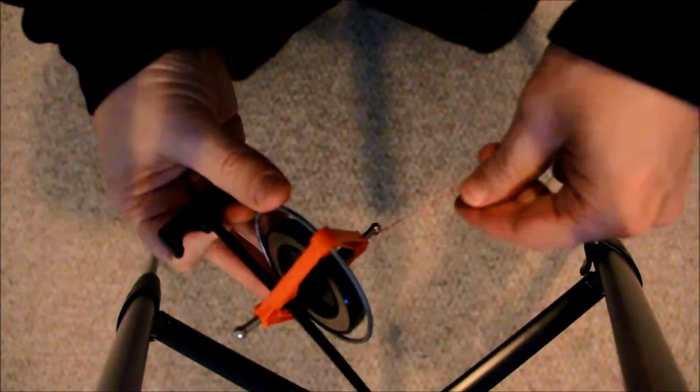I have a gyroscope, which is essentially a disc that's pretty heavy and is on an axle, and most of the mass of the disc is towards the outside to give it high moment of inertia. When I pull on this, there's gears that make it turn and spin counterclockwise when viewed this way.

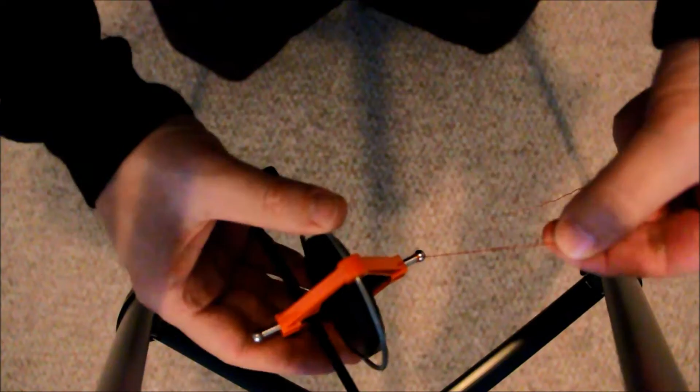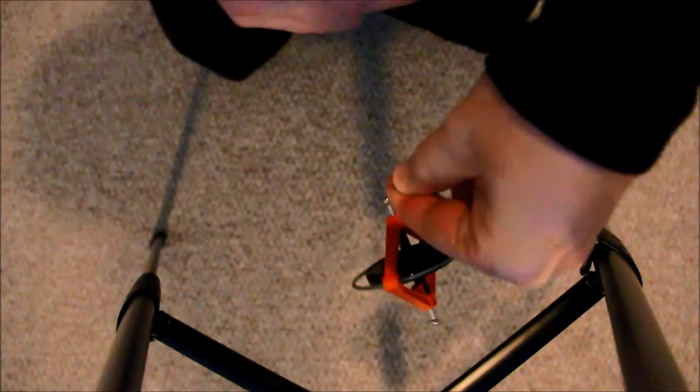Then I have a string on this end which is connected to this end of the gyroscope. I'm going to pull on it, we'll view it from the top and view its motion. You can see from the top that it's making a circular motion. That's called precessing. Here's a side view of the same experiment.

In this problem, we're going to consider a gyroscope supported on one end, and the support is such that it doesn't allow the gyroscope to move up or down, or in and out of the board. So there's a force in each of these directions that prevents that from happening.

We'll also assume there are no frictional forces that create a torque to slow this from revolving or spinning. We could solve it assuming we knew the torque acting there, but for this problem we'll start out assuming those don't exist, which makes the problem a little easier to solve.

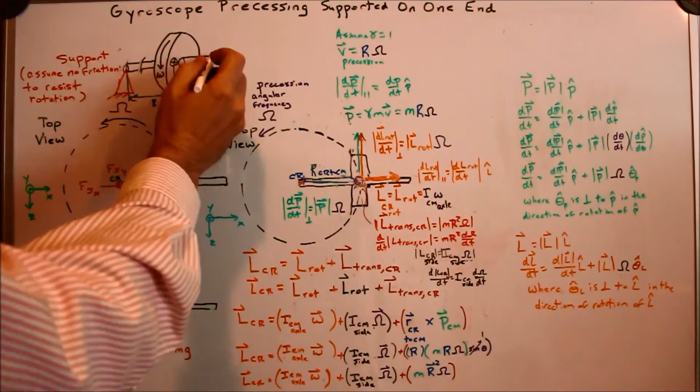So here's our system. We have a gyroscope, and it has the disc and axle spinning at an omega about the center axis of the gyroscope itself, and we'll define the distance from the support to the center of mass of the gyroscope as r.

Now let's draw the free body diagram in different views. Looking at it from the side, here's all the forces that act on it. We'll have the gravitational force pulling down to the center of the Earth, and then we have three component force vectors at the support end.

And here from the top view, we've got the same gyroscope. The X shows the force acting downward, and then I have the same three component forces. We're going to assume this gyroscope potentially has some frequency that it's precessing around this center fixed point.

As far as our system, we're going to pick just the gyroscope, and the surroundings is everything else.

We are going to define our coordinate system so that the x-axis corresponds to the direction from the center of rotation to the center of mass. Let's make our problem a lot easier to solve by having that coordinate system.

If we had it up here, then I would have my x direction running this way. But the x direction is not moving. This is an inertial coordinate system, but it is fixed to the Earth, not moving with this. Essentially we're going to say at this moment in time, when this is moving around and spinning, I'll take a snapshot, and at this exact moment of time I'm going to have that axis defined right here.

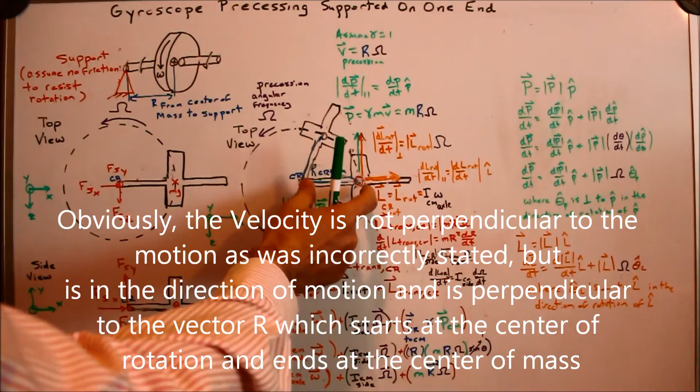So what's the velocity of the center of mass? It was here, it moves to there. The velocity is in the direction of the motion, so it'll be there. We know that the velocity of the center of mass, due to precession, is this radius times the angular frequency. The angular frequency of precession was capital Omega. So we'll have a velocity of precession, which is r times Omega.

For momentum, here's the most broad definition. For this problem, we'll assume the velocity is very small relative to the speed of light in a vacuum, so gamma goes to 1. Essentially it's mass times velocity. Velocity is here, so this is our momentum magnitude: mr times the precession angular frequency.

This is in the same directionality as the velocity. So the velocity is this way, on this plane, and there's my momentum term at this point in time. Then it's helpful to consider what's happening to momentum at a later point in time. At that later point, the momentum term would again be something revolving — the velocity is here, so therefore the momentum is there.

Now for this problem we're concerned about the rate of change of momentum as a function of time. This momentum term can be speeding up or slowing down in a given direction — let's call this the p-hat direction, the unit vector direction of p at this moment of time. So it's that direction, and later on it's this direction. We know one thing for sure: the directionality of the momentum vector is changing with time. So the derivative will have a change in directionality with time, and could also have a magnitude change.

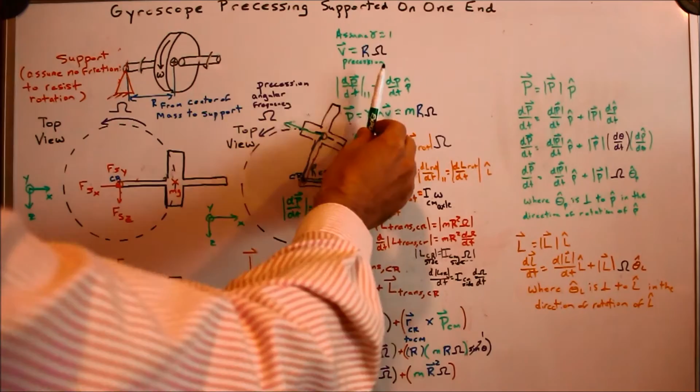Then for a vector which is circling and changing directionality, it starts out here and goes to here. We know there's a vector pointing towards the center, which is the rate of change of momentum versus time, perpendicular to its present p-hat direction. This is always the magnitude of p at that moment times the angular frequency that this momentum vector is changing. That momentum vector has the same frequency as this gyroscope, so that's the angular frequency that goes along with this term. That change vector is in this direction, so this term is pointing towards the center direction — or here, it's pointing to the center direction as well.

So now we know momentum, and we understand both its magnitude and its direction.

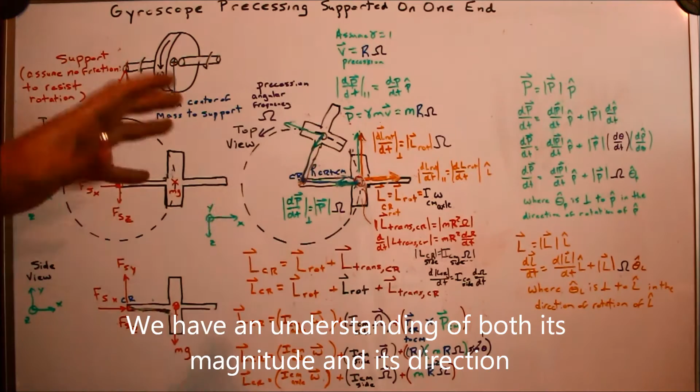Now thinking about angular momentum, because we're going to use that when we solve for torque. The broad definition of angular momentum — first of all, for angular momentum we have to think about angular momentum about what point, because angular momentum is not a constant. It changes depending on what point you say it's about. So this system, from the top view, is rotating about the center of rotation.

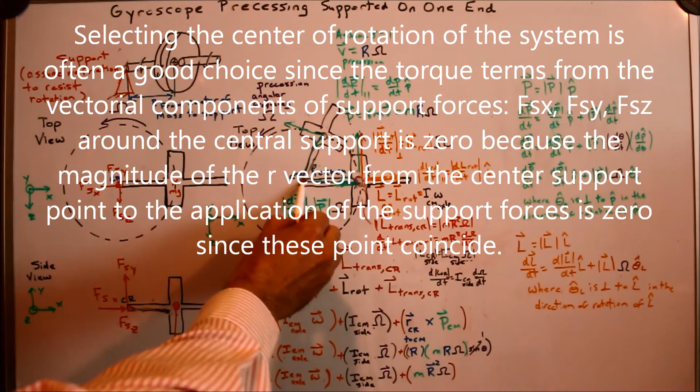For cases where I'm rotating about a center point of rotation, it's very convenient and makes the equations much easier to solve if I do my angular momentum with respect to that center rotation. So the point I'm going to pick is the center rotation. I'm going to solve it that way.

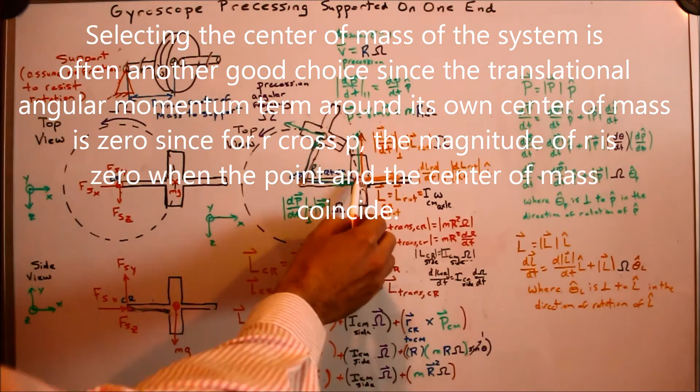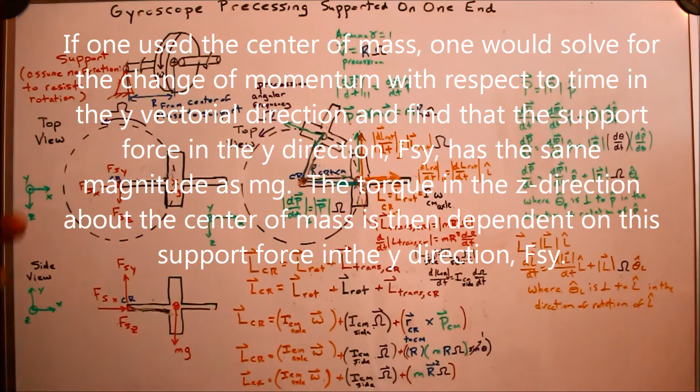Alternatively, another good point that's often very good for helping to make the problem simple is to do the angular momentum about the center of mass. I'm not going to solve it this way, but I can probably do that in a future follow-up video to solve the same problem considering angular momentum about the center of mass. But those are two very convenient points that help make the system a lot simpler to solve.

So now we picked the point that we're going to do the angular momentum about. We call it the center rotation. And we know there's two parts to any angular momentum: there's a rotational part and a translational part.

So for rotational parts, you have to think of two things. Consider its rotation has no subscript, because rotation means rotation about this own system's center of mass. It's not relative - doesn't matter if it's about CR or the center rotation or center of mass. This term, the angular momentum of rotation, is by definition about this own system's center of mass.

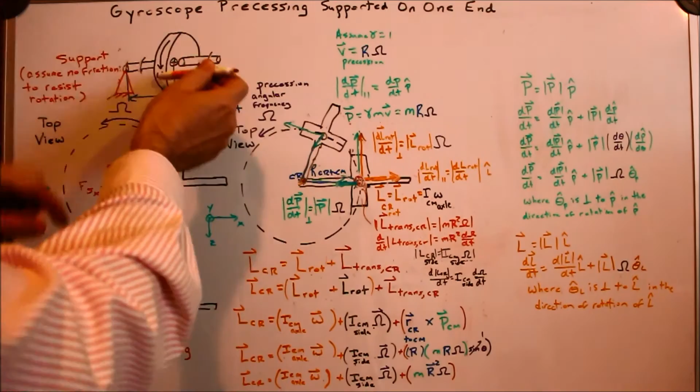So you think: does this system, relative to its own center of mass, have any rotation? Well, it does. One rotation it has is we know it's rotating along the center axle of this part. At this moment of time, it's spinning with an omega term here. So this disk is spinning, and that's spinning relative to the center of mass of this part. So that's going to provide us with a rotational angular momentum term.

Then, is there any other terms as far as rotational? Is the center of mass rotating at all? Well, if you think about it, this object right here is at this orientation from a top view, and then later it's at this orientation right here. So relative to its own center of mass, forget that it's translating or that the center of mass has moved - there is a rotational, top-view rotation about its center of mass.

Here it's pointing there. Later on it's going to be pointing this direction. So it's flipped from there to there, and then it's flipped to there. So there's a rotation in the top view. So there's actually going to turn out to be two rotational angular momentum terms.

For each one of these terms now, which are components of the angular momentum about center rotation, we need to concern ourselves with and understand both the magnitude and the directionality of these vectors. So first solving, we'll do them independently. First considering ourselves with this object rotating about this central axis. So let's do magnitude first.

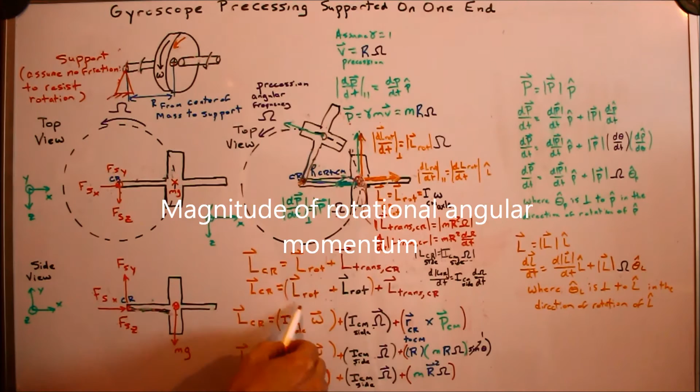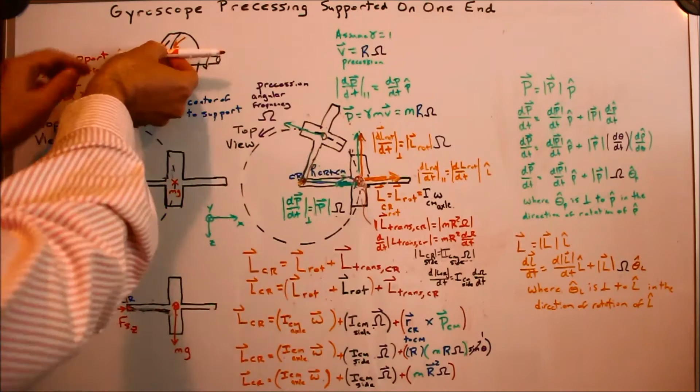So magnitude of rotational angular momentum is the moment of inertia about that center of mass as seen by this rotation - the moment of inertia around this central axis of this. And then it's multiplied by the angular frequency that this part is spinning. So that's the magnitude of this term.

So that's the magnitude. And then the question is, what's the directionality? For that, we're going to use the right-hand rule to determine directionality. So we have this thing spinning like this, with angular frequency little omega, and so my L rotation vector is in this direction. If it were spinning in the opposite direction, the right-hand rule would tell me it would be this other direction. But I've chosen to make omega this way, so that's my L direction.

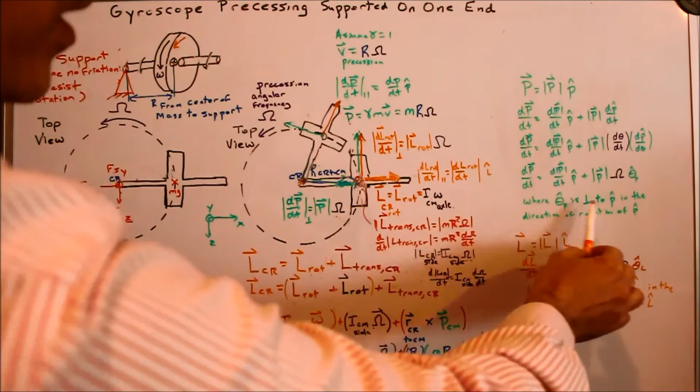And then the question is, as this is precessing around, at this moment of time it's still spinning in this direction. At that moment of time, this vector has now changed to there. So it started out in this direction, and at a later time it turned to this direction. So I can see there's going to be a derivative term that's in the direction of this based on the magnitude, and a direct derivative term which is perpendicular to that. Just as I could solve it right here, I can do the same thing here - this angular momentum term right here is changing.

At this moment of time, the angular momentum is the magnitude times the directionality, so this is the L hat direction, and I have a component which is also in the L hat direction, which is how the magnitude is changing, as I'm turning this way. This component is instantaneous, at that moment times the frequency that this is turning, just like the momentum term was turning at this frequency. That's the magnitude of this vector in this direction, perpendicular to the instantaneous direction of L hat. So there's my angular momentum term, there's my rate of change of angular momentum parallel to it, and there's my rate of change of angular momentum perpendicular, just considering this term alone.

So now let's consider the next term. Again, from the top view, we have this thing rotating this way, spinning like this. So something's spinning like that. I can see that the angular momentum direction is going to be out of the board, about its own center of mass. So I know this one's vectorial direction is here out of the board, and right here at this position it's spinning about this point, considered spinning about its own center of mass. So it's out of the board here, out of the board here.

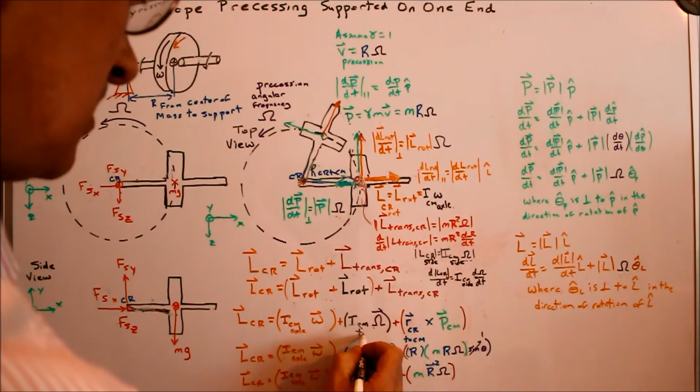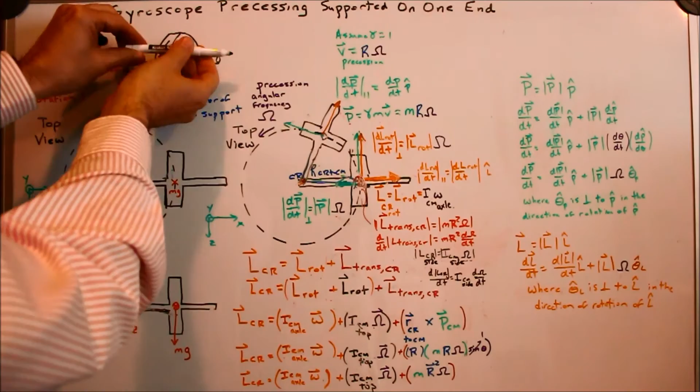There's no change in the directionality of this vector, so the only thing that can potentially change is its magnitude. So what is this magnitude? It's from this top view, or side view - I guess we'll call it top. From what's seen by the top view, what we can solve, we'll have to have some information about the geometry of this gyroscope, but what's the moment of inertia about the center of mass in this top view? That's different than this one - it's resistance against spinning in this direction. This one was resistance against spinning along the axis. So those are two different moments of inertia about different views.

And then that's that moment of inertia times the angular frequency. Where here was the angular frequency about spinning in that direction, this is the angular frequency about spinning this way, which is capital omega. So now we know this term, and we know that both its magnitude here is in this direction, and potentially its only rate of change is in this direction. It has no component this way because that vector is not changing. So now we know everything about this term - its directionality, its magnitude, and its derivatives versus time.

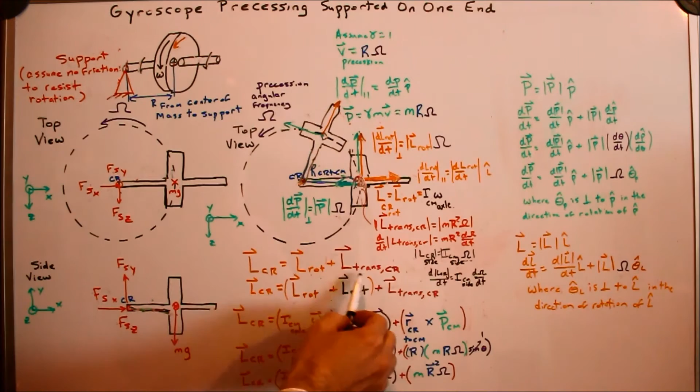Now let's consider this term - translational, remember, consider everything boiled down to a point mass located at the center, and it's R cross P. So what does that mean? R is a vector that has magnitude and direction, from this center of rotation to the center of mass. So there's my R vector. And then P is the momentum of the center of mass, so that's going up. So R cross P - I know that this vectorial term is, once again, coming out towards me, so it's going up, pointed in the upward direction.

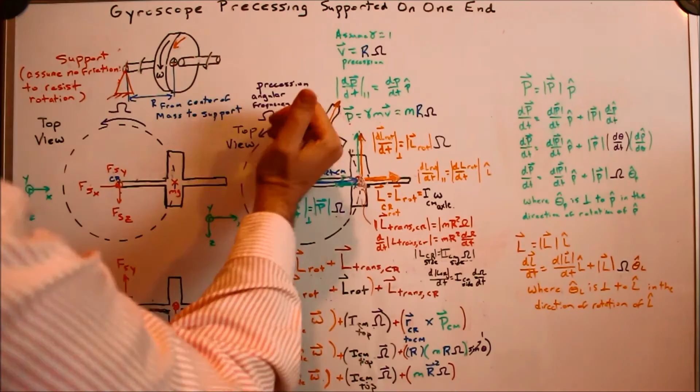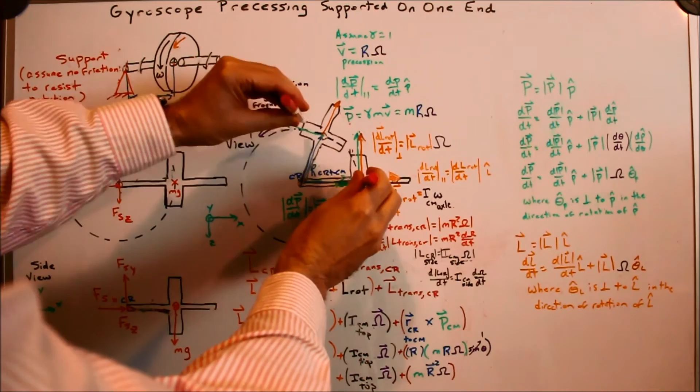And then at this moment of time, the R cross P again is pointed up. So at both moments of time, this vector is pointed up, so there's no directional change of this vector. The only thing that's changing is magnitude - if it's speeding up, if the P term changes, while R's magnitude is constant, that term's constant. This term may be changing. So now we know the directionality of that, and at any moment of time, this R and the P vector are perpendicular, so the sine of the angle is 90 degrees, so it's 1. So here's the magnitude of this term.

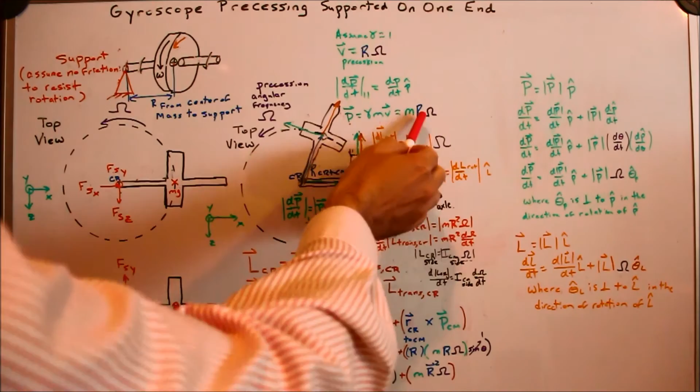We know P, center of mass, we got it from here. So R times m, R, capital omega, angular frequency, because we know that's how that P vector is changing. So coming in here, I can see that's m R squared, angular momentum. Now we have an understanding both of the magnitudes and the directionality of all these components of the angular momentum about the center of rotation, and we understand about the momentum and the rate of change of momentum and the directionality of all those vectors.

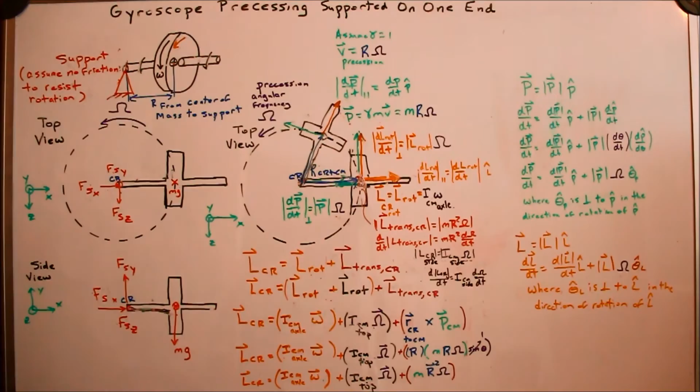We're going to use momentum now to solve for motions and some forces. The two momentum equations we know are that vectorially, the change of momentum with respect to time is equal to the net force on a system. Our system is the gyroscope. We also know that the change of angular momentum about any point equals the net torque around that point.

We're going to start looking in the z direction. So this component term, we can think just in the z direction: the angular momentum about the center of rotation in the z direction, and the net torque about that center of rotation in the z direction.

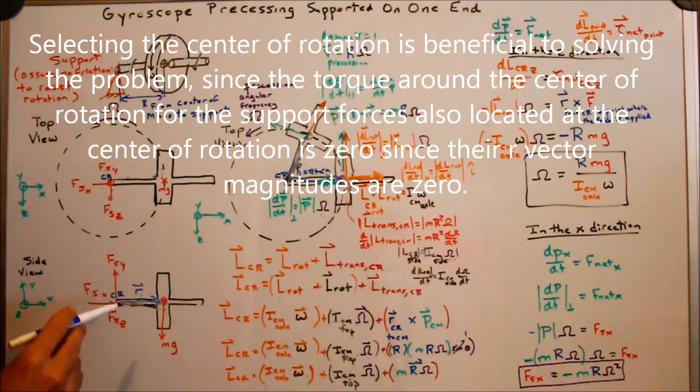So we'll start with this term, looking at the net torque. Torque is r cross F, where r is the vector from the point we're choosing—torque about the center of rotation—to where the force is applied.

Here's that r from the center of rotation to where the force is applied. This force is mg, and they're perpendicular to each other in my case. Using the right hand rule, r cross force gives a vector into the board. Or you can see it from the top view: here's my r, and the force is going down, so r cross mg is in the minus z direction. This torque is in the minus z direction.

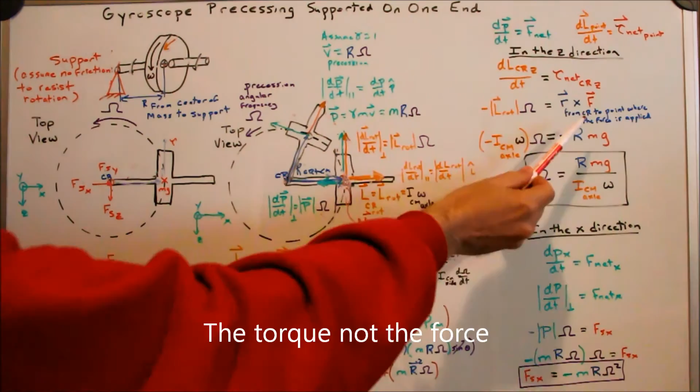There's this magnitude: the magnitude of r, and the magnitude of the force is mg. So our torque is r, which is that distance, times mg, and it's in the minus z direction. So there's this net torque around the center of rotation in the minus z direction.

Now looking at all the terms we had previously for the change in angular momentum, the only one we're concerned with is in the z direction. From the top view, that's something working either this way or this way. So it's not this magnitude change here, which is perpendicular to that, but this term right here we can see is in the minus z direction.

So this is a component of angular momentum with respect to time, and it's of this magnitude. Since it's turning this way, it's also in the minus z direction. So that took care of this term.

These terms—we recall that the derivative with respect to time points out of the board, so there's nothing there in the z direction because they're in the y direction. The same thing for this rate of change here, also in the y direction. So the only term right here with any z component is this term right here.

Now substituting in: we know the magnitude of angular momentum of rotation for this thing spinning is the moment of inertia about the center axis times the rotational frequency, the angular frequency—so I omega. So putting this all together, there are my terms.

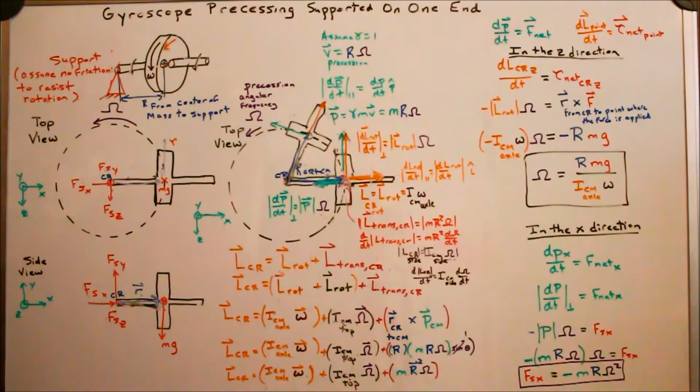This is a simple solution showing the power of picking the center of rotation as the point about which we take angular momentum, because it makes solving the problem very easy. It's also important to remember that even though you did all these things, you always have to consider things vectorially.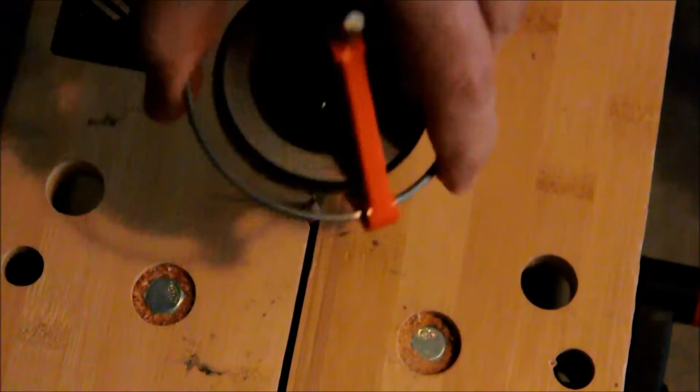In this video, I will pull the gyroscope so the disc rotates in a clockwise direction. You can see that the precession is also in a clockwise direction. If I pull on the cord so the gyroscope disc rotates in a counterclockwise direction, as seen from the top view, it will also precess in a counterclockwise direction.

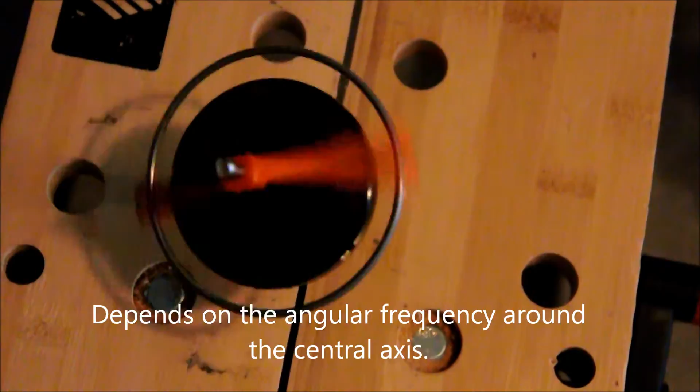If you play with the gyroscope, you can see that the precession frequency is independent of the tilt angle. It just depends on the speed. As it slows down, the precession frequency increases—it's speeding up in precession frequency.

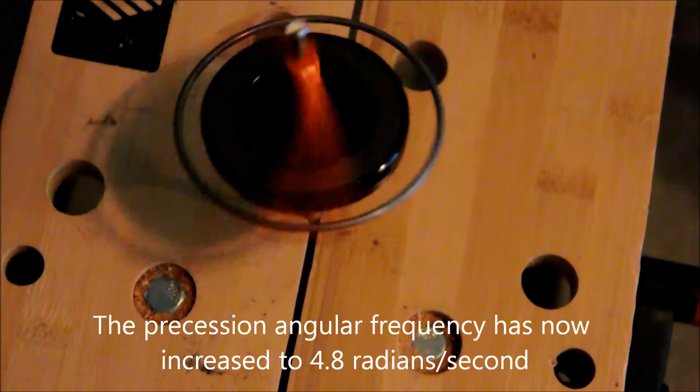A gyroscope that's tilted rather than horizontal further highlights the importance of thinking of things vectorially. So we have this gyroscope, and I'm assuming it's tilted at an angle beta relative to the vertical. Therefore this distance from the top view, instead of r, is going to be r sine beta. So essentially r sine beta becomes that value here.

Now we think about what happens to angular momentum. Most of the angular momentum terms now can also include a sine beta term, let's think about that. We know that the important one, and the one that's still going to matter, is this rotational angular momentum about its own center axis.

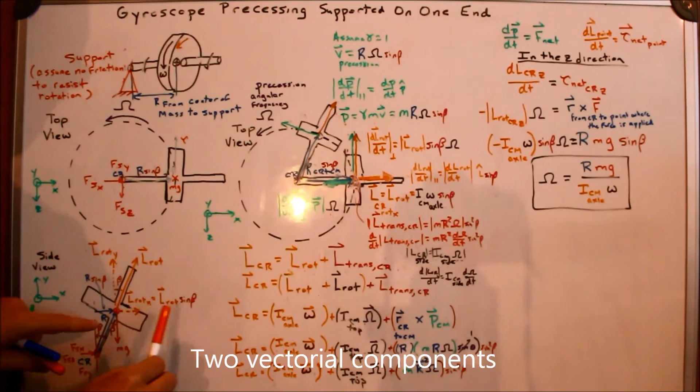At this moment in time, it's rotating here. This term right here is this magnitude, and it has two components: one in the x and one in the y. This one was going to be the magnitude times sine of beta, and this one would be the magnitude times cosine of beta. Now think about this term from the top.

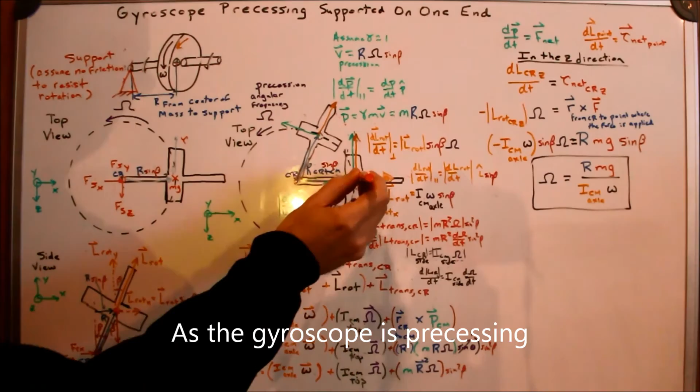As this part's rotating, what happens to this y term? Think about it from the top view—it goes from there to there. This y term doesn't change directionality as this now-tilted gyroscope is precessing. So this term has no d angular momentum dt term—it becomes zero because this term is always pointing upwards. There's no angular component.

But this term right here, again with the sine of beta, is pointing in that direction, and as it precesses around, this term does change. So when we think about our equation, the change in the z direction now only requires the sine of beta term. The cosine term doesn't change directionality, so you can see how this part of the equation changed.

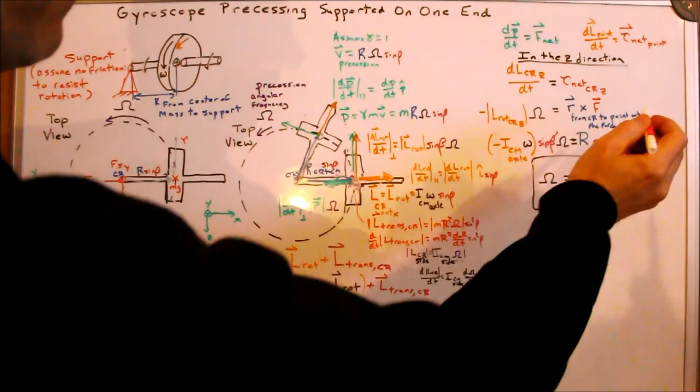Now thinking about torque, this side of the equation, the torque in the z direction: torque is r cross the force, so there's r cross the force, and you can see there's the angle beta between them. So it's r times force times sine of the angle between, which is this. You can see this term now has a sine of beta, and that term has a sine of beta, and ultimately they cancel out. So you can see that the precession frequency is independent of the tilt angle.